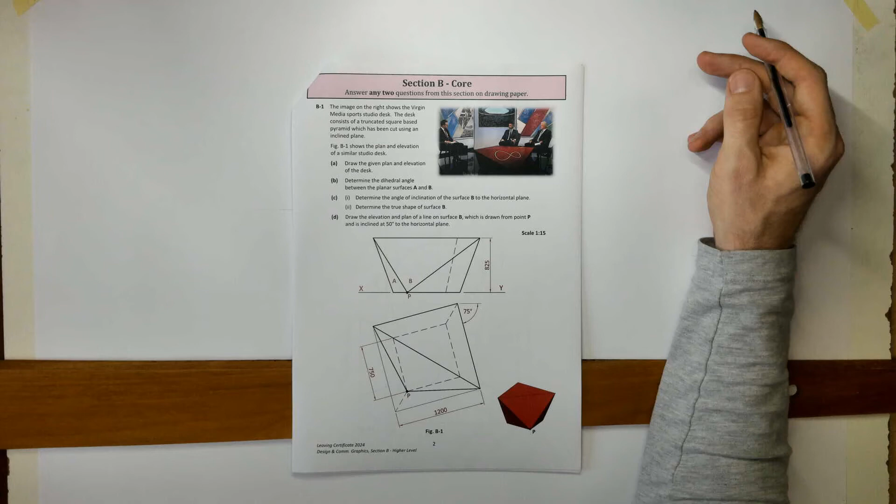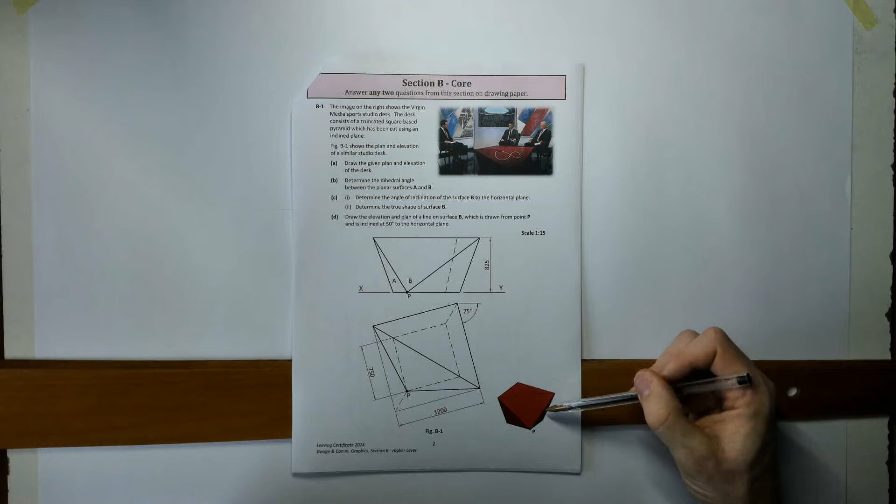This was an intersecting planes question. So the image on the right shows a Virgin Media Sports Studio desk there. The desk consists of a truncated square-based pyramid which has been cut using an inclined plane. Okay, so we've got a truncated pyramid, which is a pyramid that has been cut horizontally, and then we've got this inclined plane that's removed another piece of material down here, right?

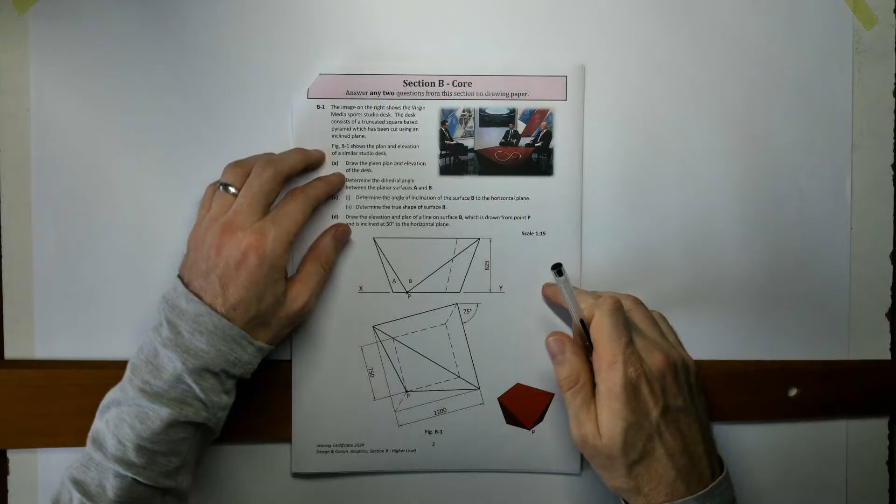So figure B1 shows the plan and elevation of a similar desk. So we've got our plan and elevation. We've got our 3D figure down here. So part A, draw the given plan and elevation of the desk. Okay, so plan coming first, so we'll start by drawing the plan. All right, if we look at our measurements here, we can see they're kind of large, right? And we've got this scale 1:15. So our measurements here, we're actually going to need to convert.

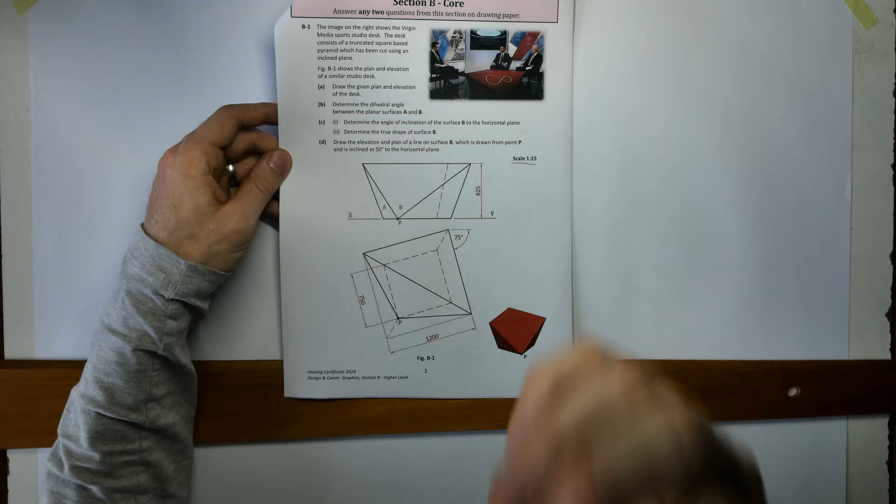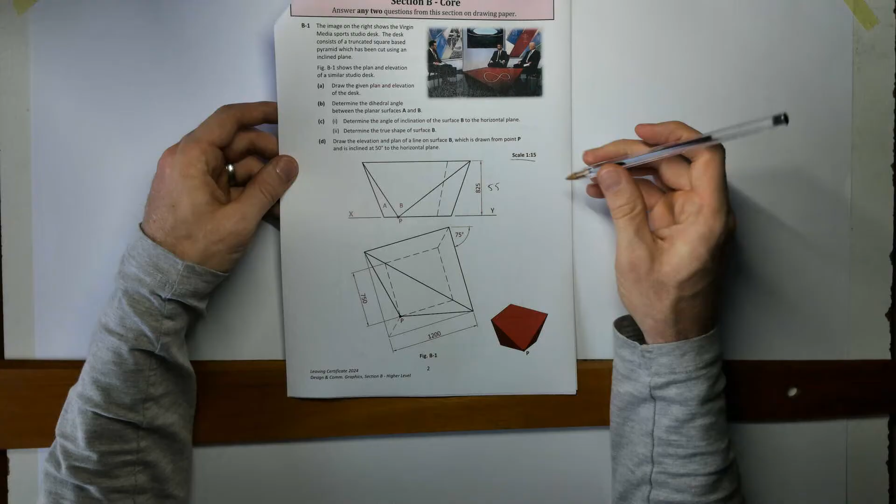So if I divide that by 15, okay, that is going to be 55. I'm pretty sure. 55. Yep, over here. And that's going to be 50. Yeah, it's 50. Okay, and 15 into that. That's 80. Okay, let me just double check that on the calculator. Yeah, so all of those are correct.

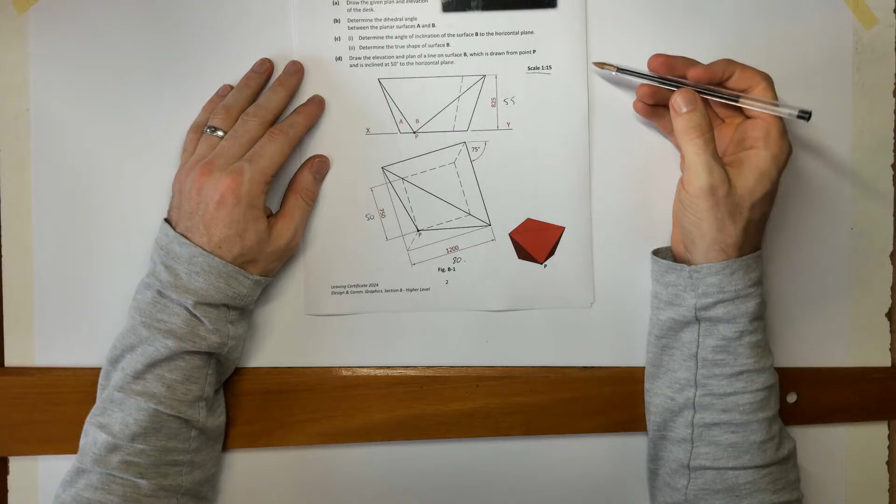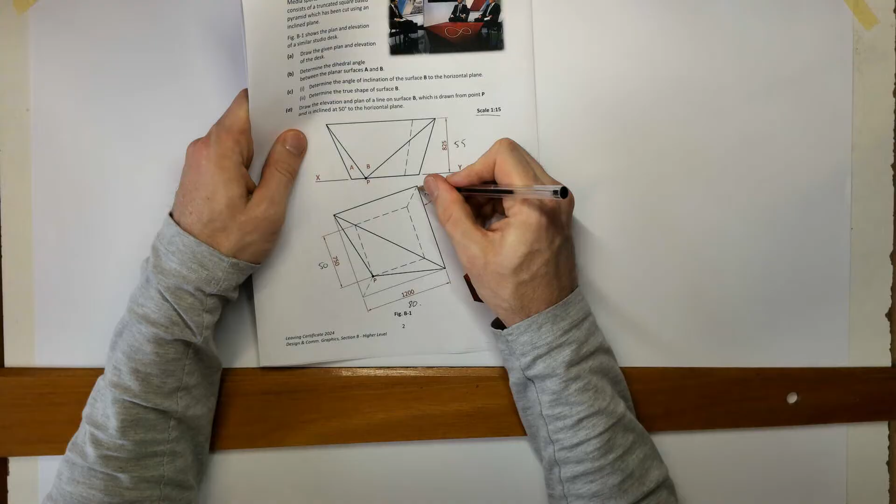All right, so I'm going to start with my outline of the truncated pyramid. So that top piece there, it's a square-based truncated pyramid, so it's a square here going around that. So a square side 80, and it's inclined at the 75-degree angle. Okay, so I'm going to pick a point here, maybe out there. That's going to be my starting point, right? And we've got that 75-degree angle. Now you could use your protractor to measure that, right?

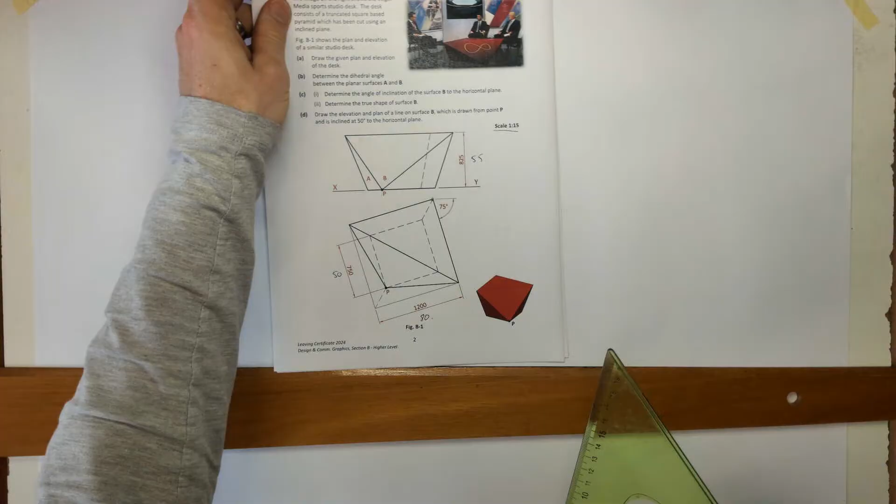But if I combine, just to show you here, if I combine my 45-degree angle and add on a 30-degree angle, 30 degrees plus 45, I get 75. Okay, so that will save me a little bit of hassle. So 45 and 30 combined. Let's just draw my light line, and I'll measure 80 on that.

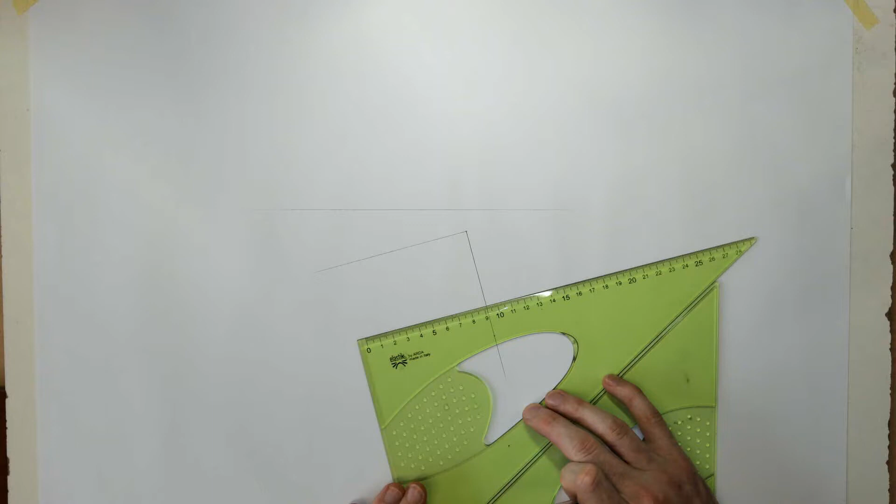Okay, and I can combine them here to get this line. The same, if I can get it to stay on the board. All right. So that's my 80 again marked off. And I'll combine them again for my final measurement, or my final edge. Okay, so that is the square that's on the top.

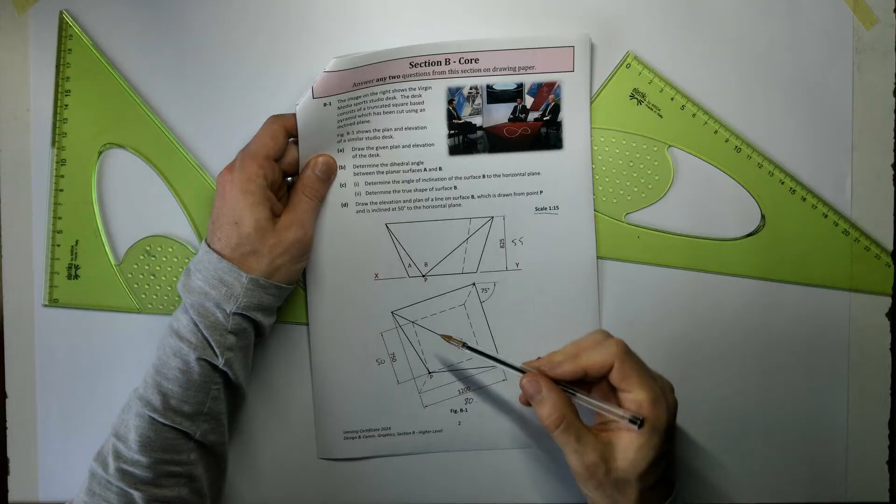We now want to mark off the internal part. So the hidden detail here of the base, which is 750, which is 50 there. So to find that, I'm going to actually draw a diagonal first of all. So draw the diagonal. Okay, and I'm actually going to draw a light diagonal from here to here as well. Right, now my 50 is the full width across there, so I'm going to measure 25 out either direction.

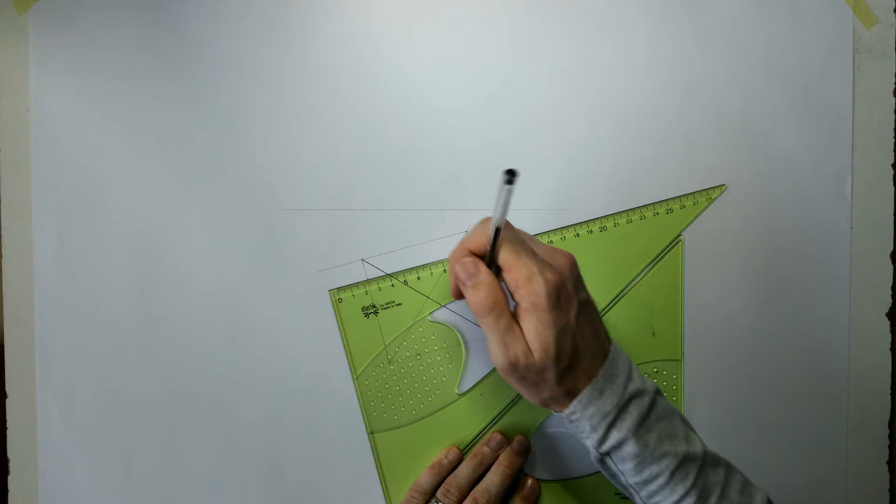Okay, so it's total 80, 30 is what I'm removing. So if I measure in 30, so 15 and 15, 15 and 15, that leaves me with my 50 there. Yeah. Okay. And I can use my combined set squares to start drawing those lines, finding those marks. Okay, so you can see here how having the two set squares together makes it all work a little bit quicker.

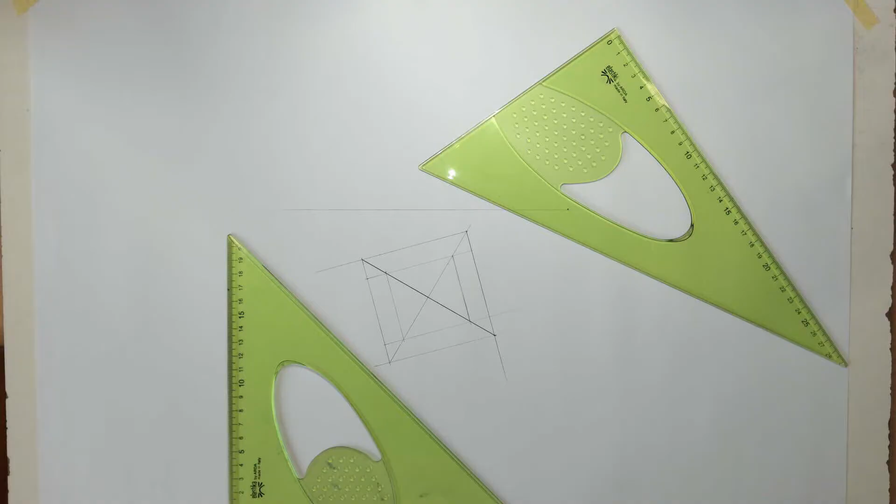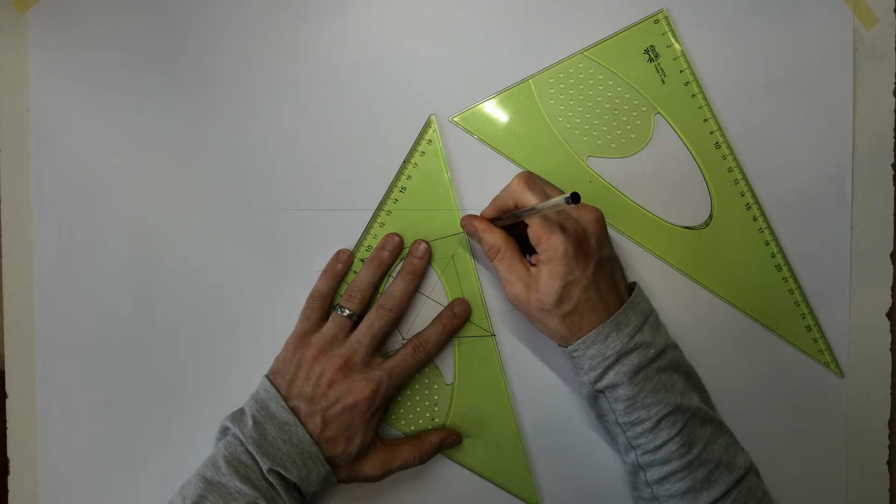Okay, and now we want to just finish off our outline. So we've got hidden detail in there, and we've got the join back to point P there. Okay, so that's the point P. Point P found. And we've got our other heavy edges for the top. Now we've got hidden detail. And the last piece of hidden detail.

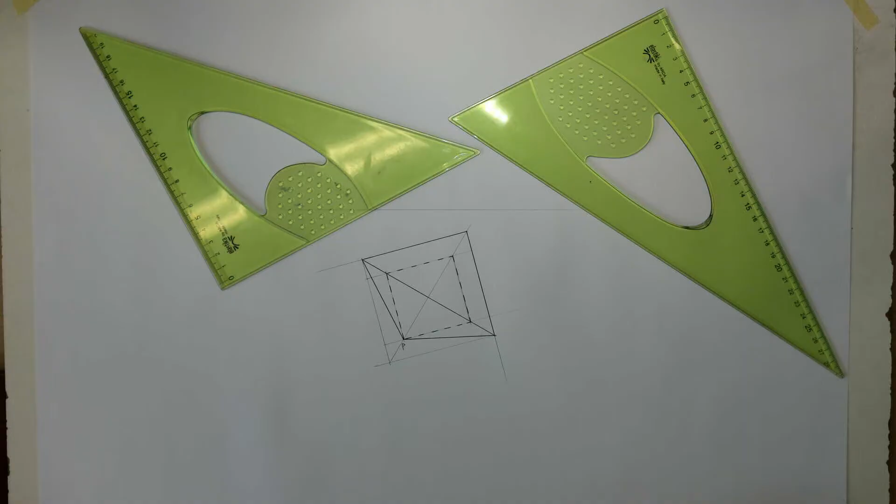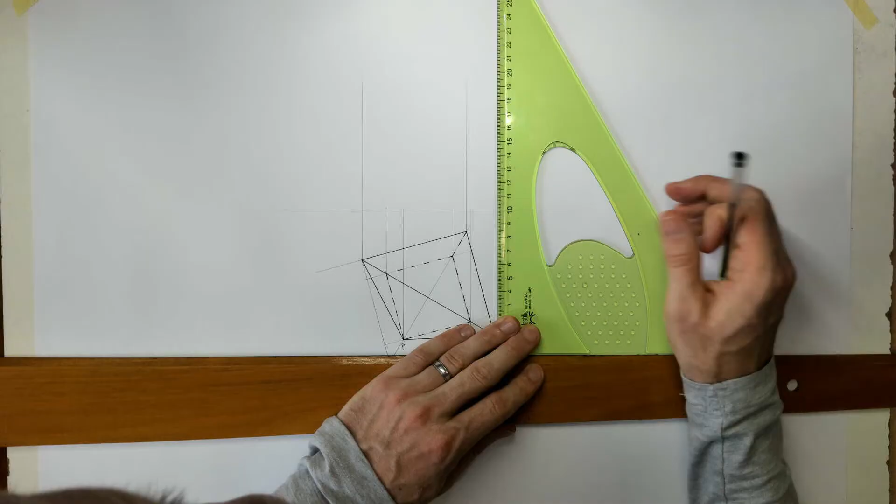All right, now onto my elevation. So the only height I have here for the elevation is that 55. So let's just project up each one of those. We're going to have our baselines as well. Yep, and 55 high. Right, so I've got the outline of all that. I just need to add in what's heavy and what's hidden detail. So we've got the outside edge, side edge to here.

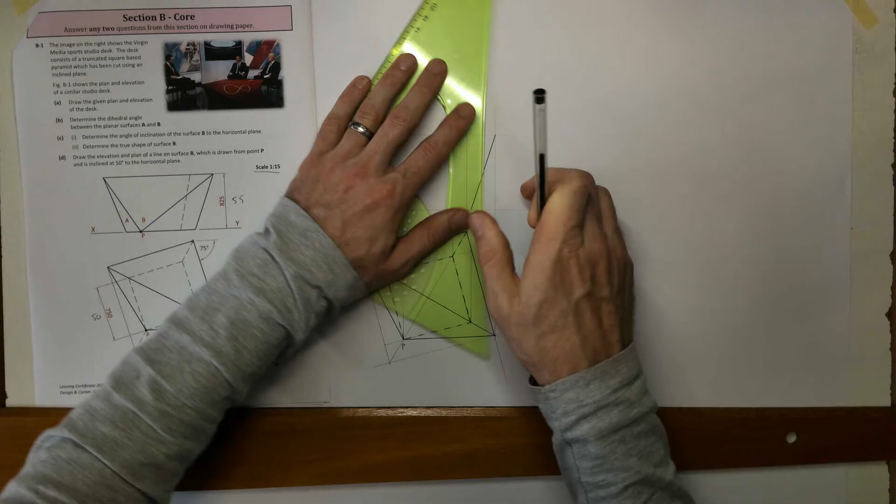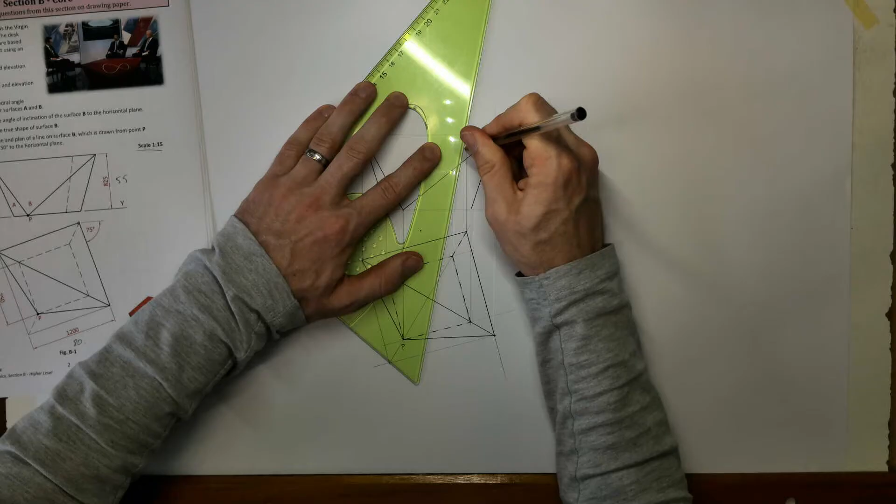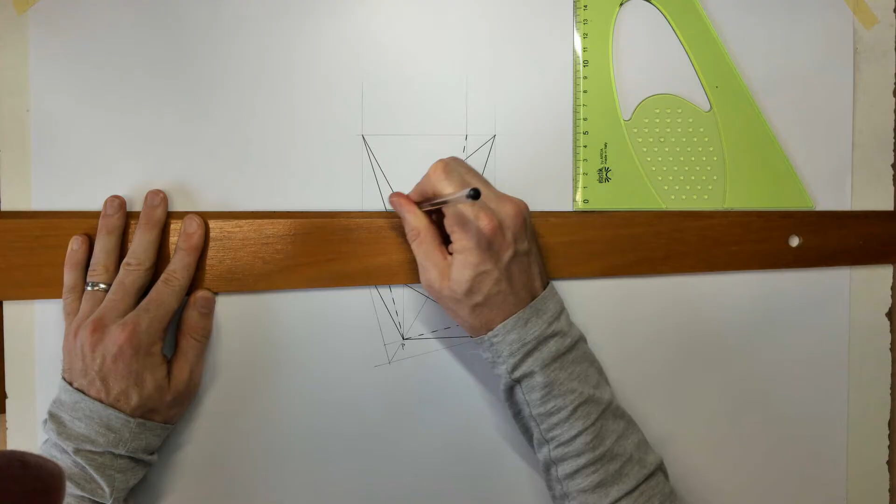That's my point P. And hidden detail line. And let's not forget the top. All right, and point P. Right, and we got surface A and surface B. So that is my plan and elevation. Just want to check everything.

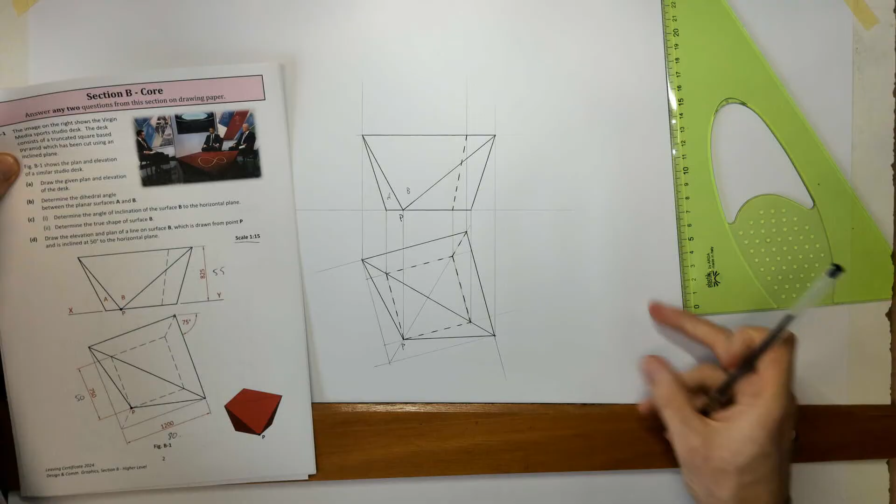Yeah, completed there. Now, part B, determine the dihedral angle between the planar surface A and B. So here's surface A. There's A in there. And here's surface B, and that's surface B. Okay, so first of all, we need that line of intersection. So my line of intersection between those two planes will be this one here. So that's my line of intersection. And here it is here also, line of intersection.

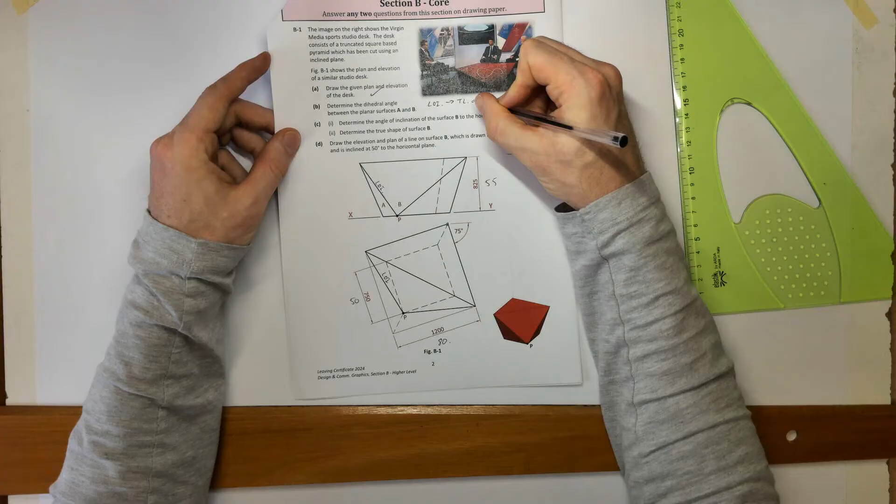What we want to find then is the true length of the line of intersection. Okay, through an auxiliary view. So we're going to look at perpendicular to it, our x1, y1 out here, and draw our auxiliary view. And then we're going to find our point view.

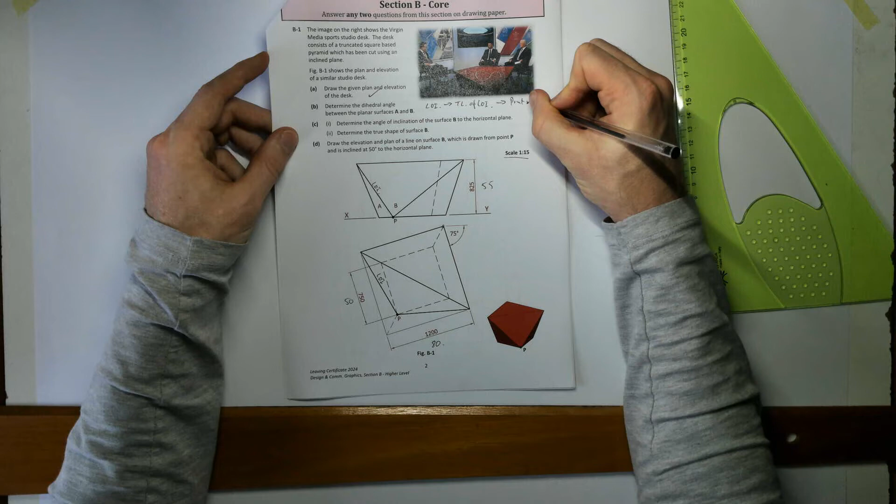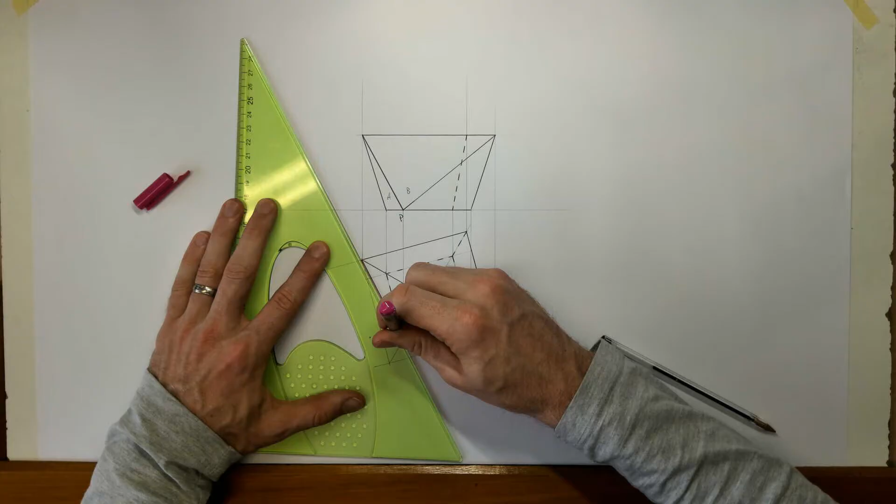Point view of LOI, and that should find us our dihedral angle then. All right, so let me just highlight the line of intersection first there. So here's our line of intersection, and here it is. Okay, so LOI. All right, so we want to look at perpendicular to that.

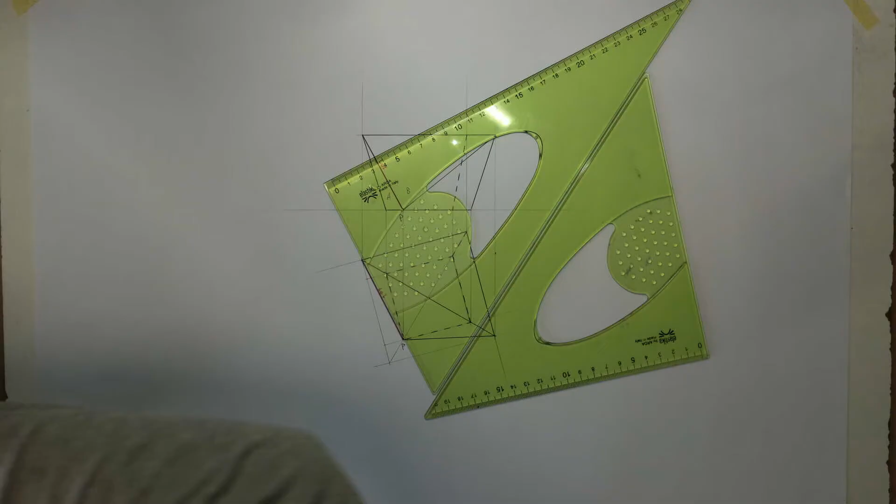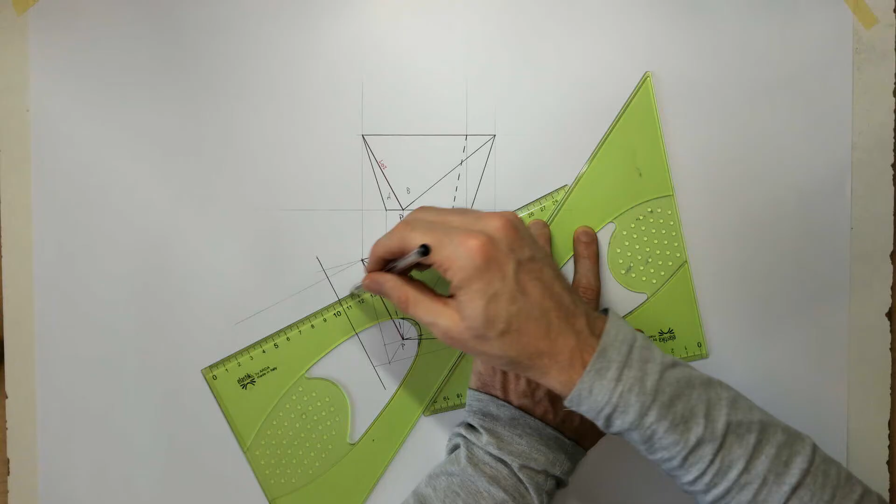So here's my sliding set squares. Let's set up my x1, y1 parallel to the line of intersection. And we're going to project out all the points of surface A. And I need to slide this again. I need to find surface B also.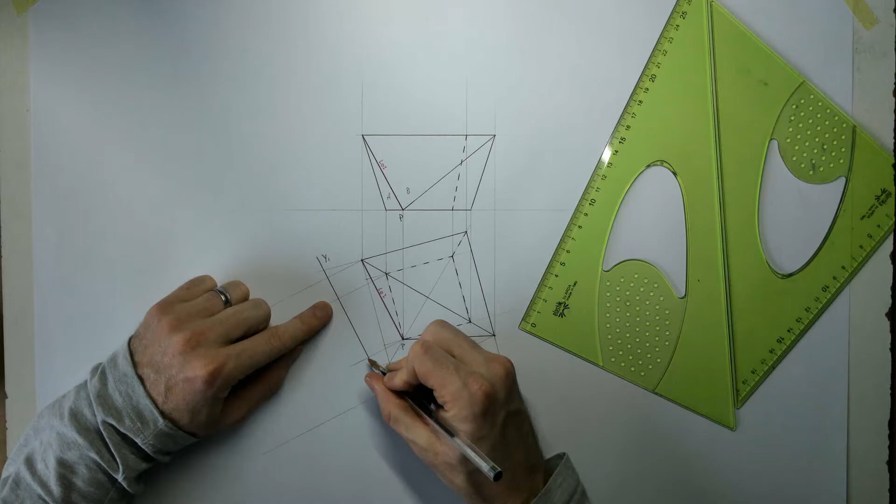Okay, so that's my x1, y1. Right, so I'm creating an auxiliary plan. Sorry, auxiliary elevation. So I take my heights from the elevation. So we've got various points. So P, this is point P on the ground. This point is also on the ground. We follow it up, right?

We've this point here, which is on the line of intersection. We follow it down, so I need to step off that height, which we know is actually 55, but it's good to have the habits of showing that with an arc. And we've also got this point, which is also a height of 55.

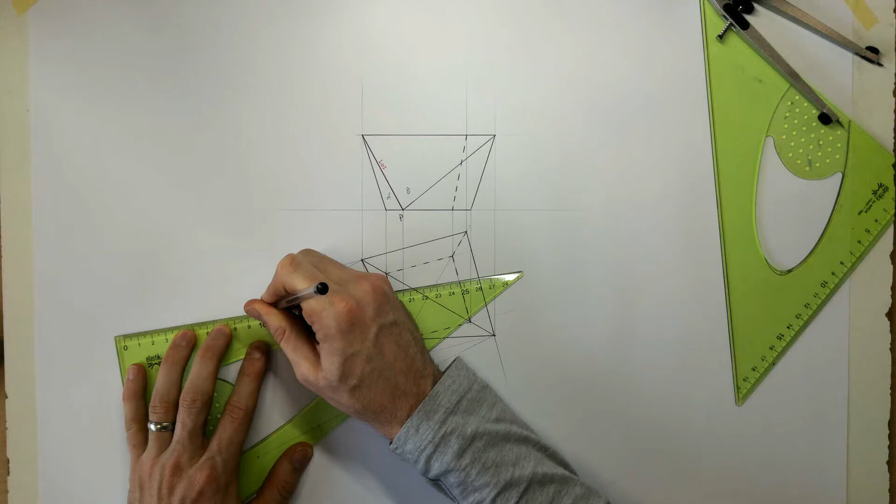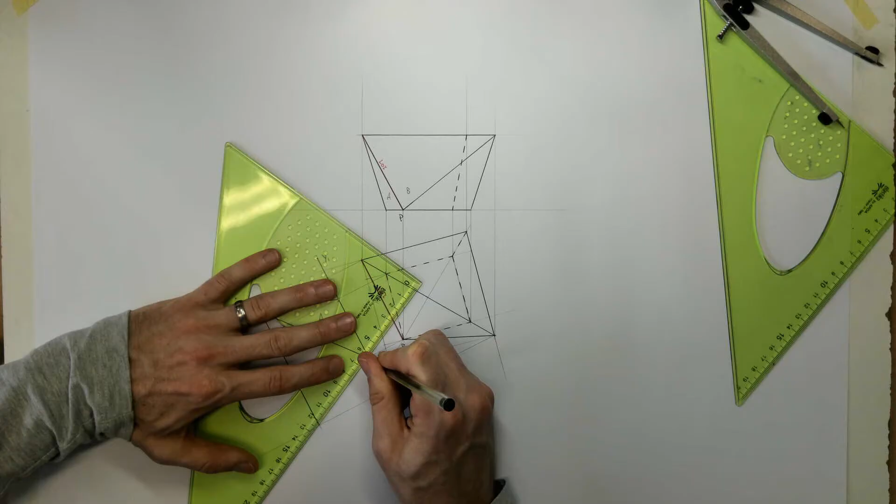All right, so let's draw up that surface A to begin with. And here's surface A as well. So that's surface A. Here's surface B then, and that's my line of intersection. Surface B. And let's just highlight the line of intersection here for you again. That's the true length of LOI.

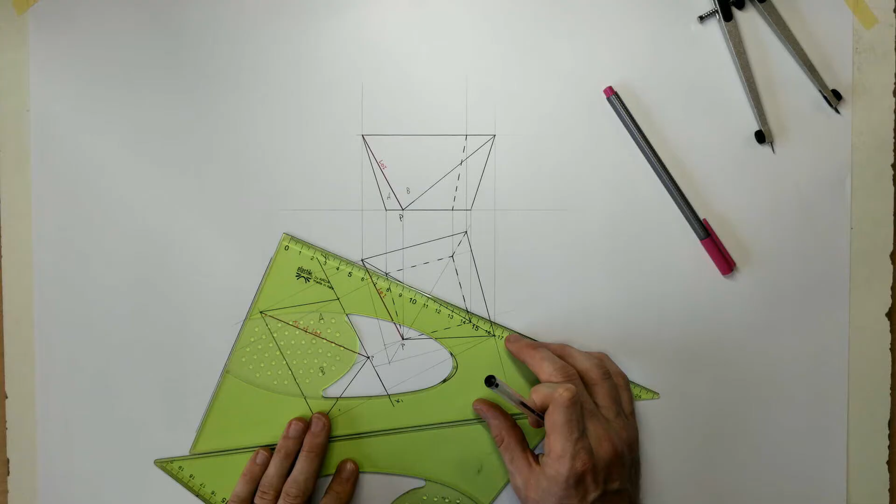All right. So now I want to look along. So I've line of intersection, true length of line of intersection. Now I want to see it as a point view. So I'm going to look out along the line of intersection. So my x1, y1, or sorry, x2, y2, and I'm going to project out our distances, so our lengths, our points.

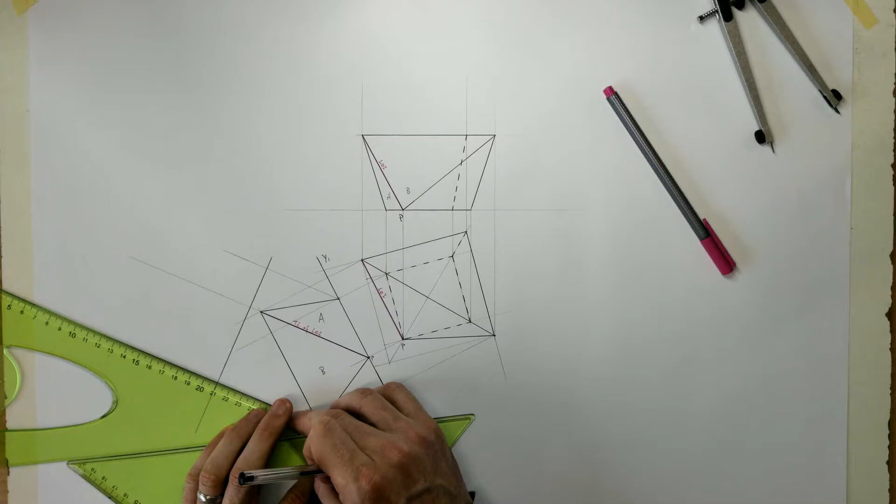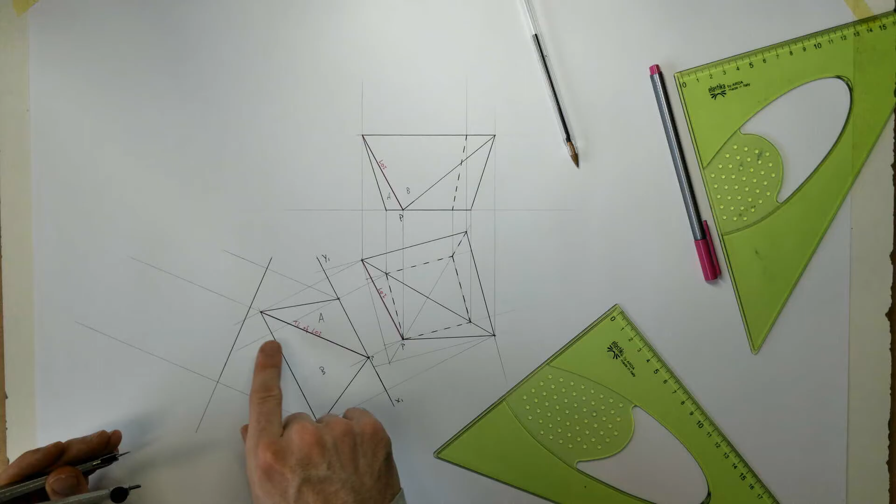All right, and projected them all out. Okay, so now we need to go back two views to get my heights. Okay, remember, if you ever forget this, right, we're looking to find a point view of the line of intersection. So whatever the distance is that I step out for this point, it'll be the same for this point.

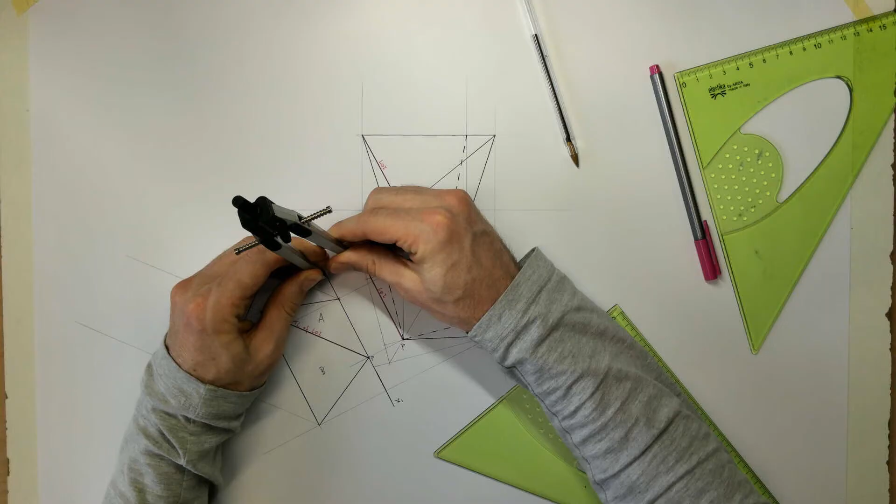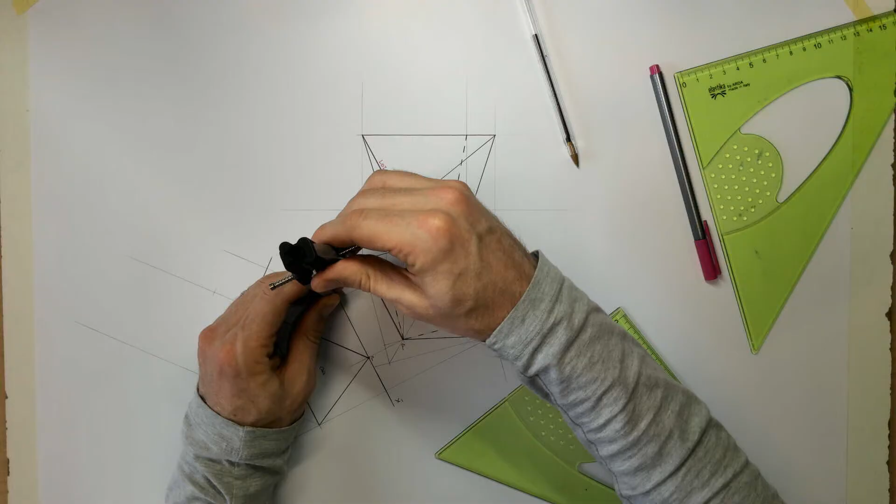If we go back here, we can see the distance for there is the distance for there. So I know that's where I'm going to take my heights from. X1, Y1, back. So those are the same distance. That's going to find me my point view. And then this point, step that off also. So I have to extend that line a little bit further. And finally, this point here. Okay, so extend that a little bit further.

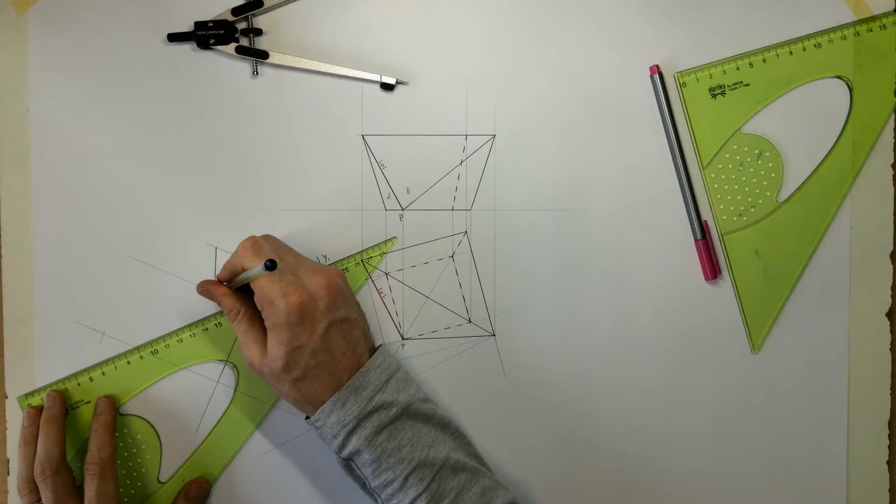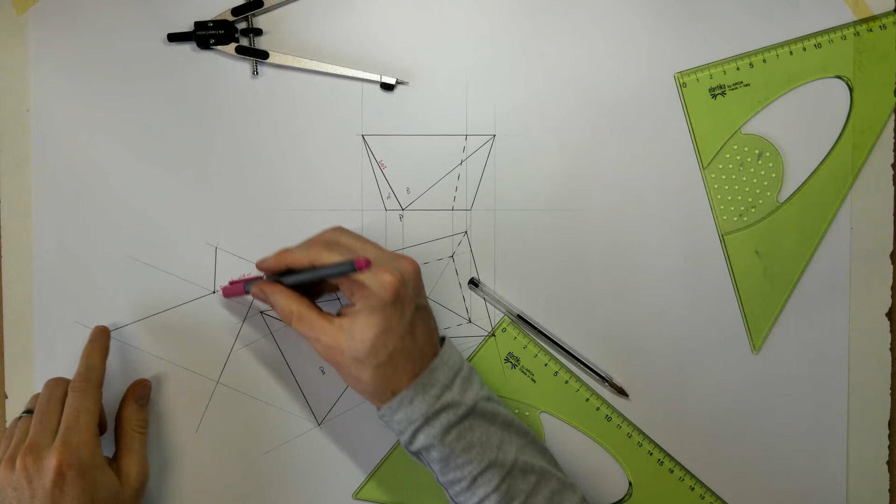Okay, so here we have our point view of the line of intersection. So point view of LOI. All right, and we've got our two surfaces there. And did they say to indicate, determine the dihedral angle? Okay, they don't say to indicate it, but I'm going to measure it because it's a good habit to have.

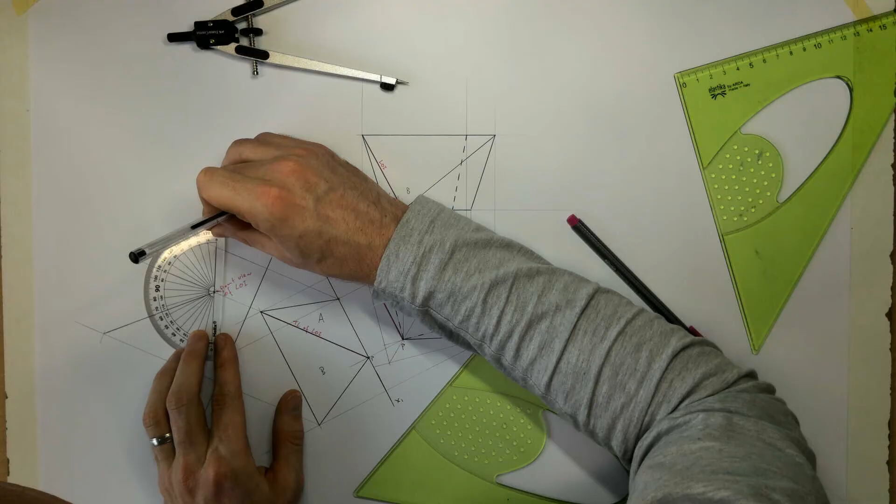So, measure there. Got that at 116. Okay, so 116 degrees is my dihedral angle. Okay, so that's part B completed. All right, my point view also completed.

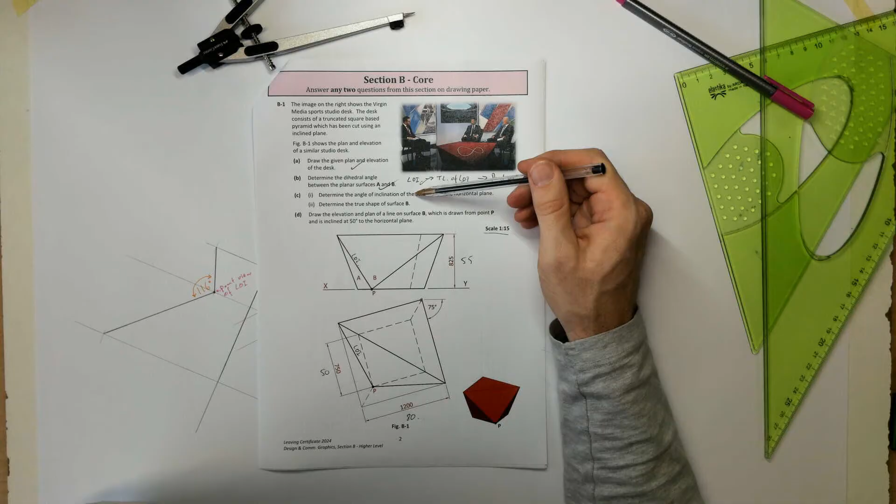Okay, part C1, determine the angle of inclination of the surface B to the horizontal plane. All right, surface B, we're going to find its inclination to the horizontal plane. Okay, so we want to see surface B as an edge view and the horizontal plane as an edge view also. Right, so I'm just going to pause the video and highlight surface B for you. Okay, so here we have surface B highlighted for you.

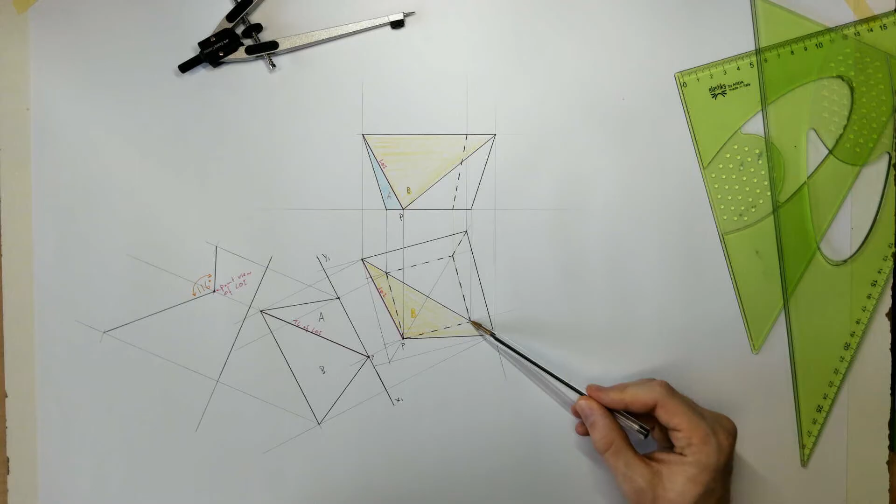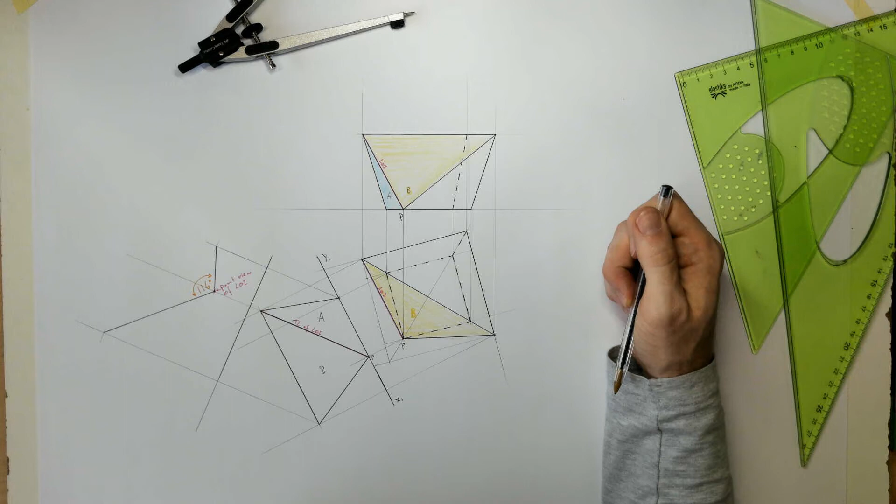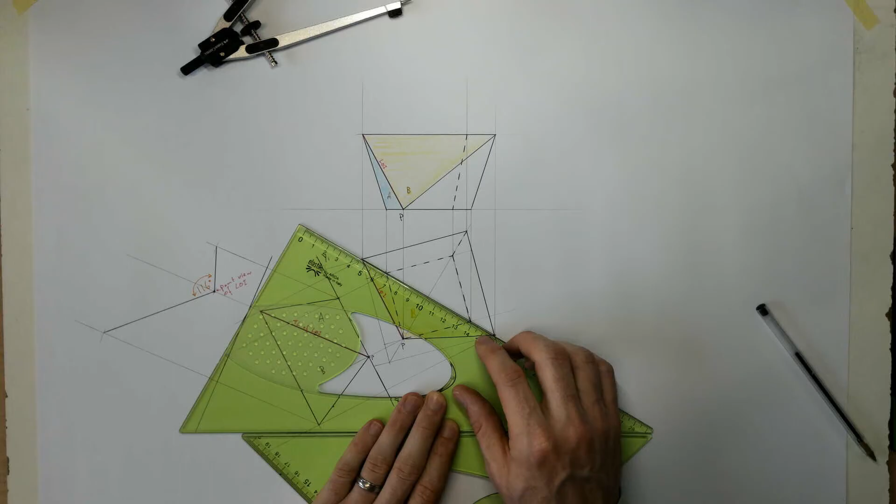All right, if we look at surface B and what's the makeup of surface B, we have our line of intersection, we have this sloping line also, and then we have this line here. If we look at that line in elevation, that's a horizontal line. So I know a horizontal line, if I look down on top of it in plan, is a true length line in plan. Okay, so this line is a true length. If I look out along that true length line, I'll get an edge view of that plane. All right, so we are going to do an XY line perpendicular to the true length line. Okay, and this.

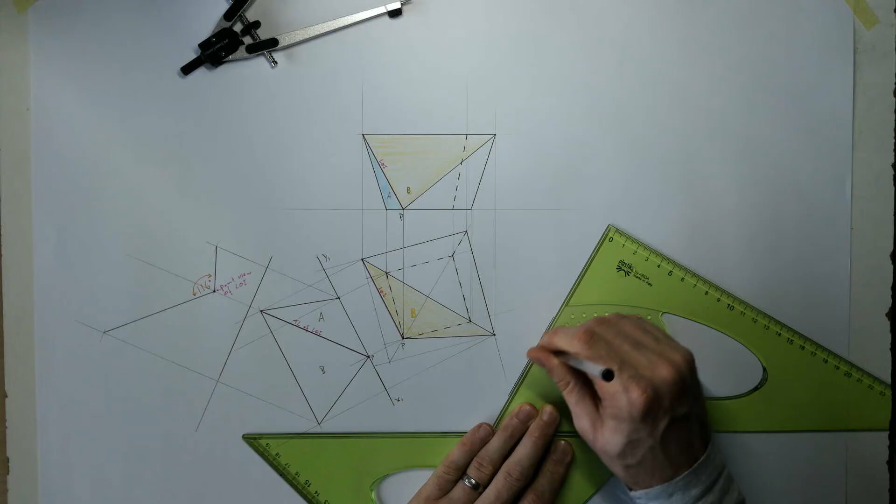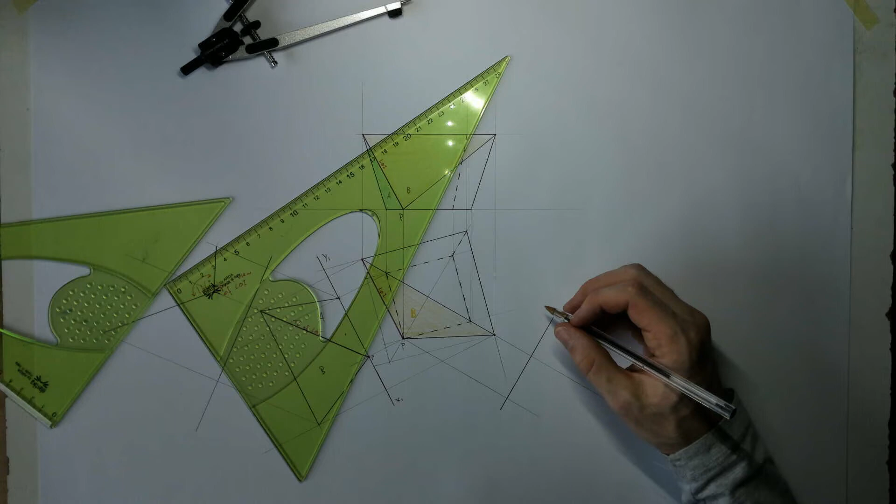All right, and we'll project out B. Just extend that a bit. So I've got an X1, Y1 here. X1, Y1. So we're projecting an auxiliary elevation, so my heights I need to take from the elevation.

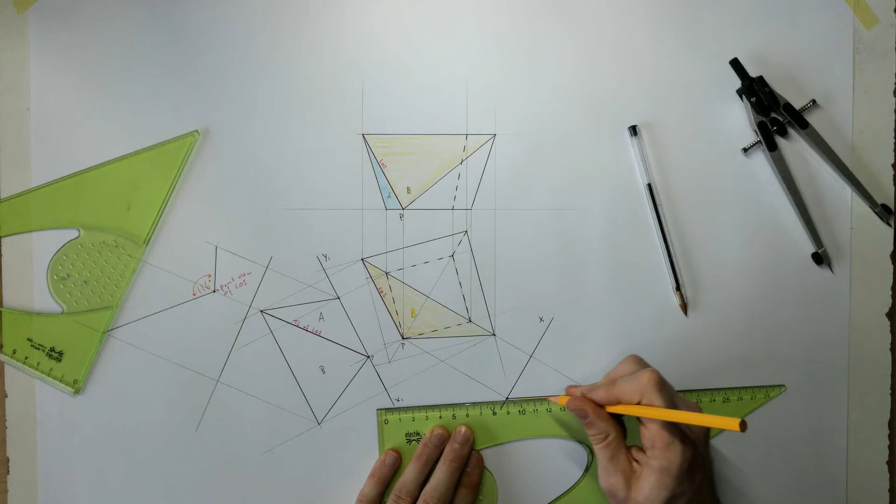Compass. So P, here's P, so that's a point. This and this, if we follow them up, have the same height. So let's get that height, step it off. And now I've got an edge view of surface B. So here's my yellow guy. So that is an edge view of surface B, and we have an edge view of the horizontal plane.

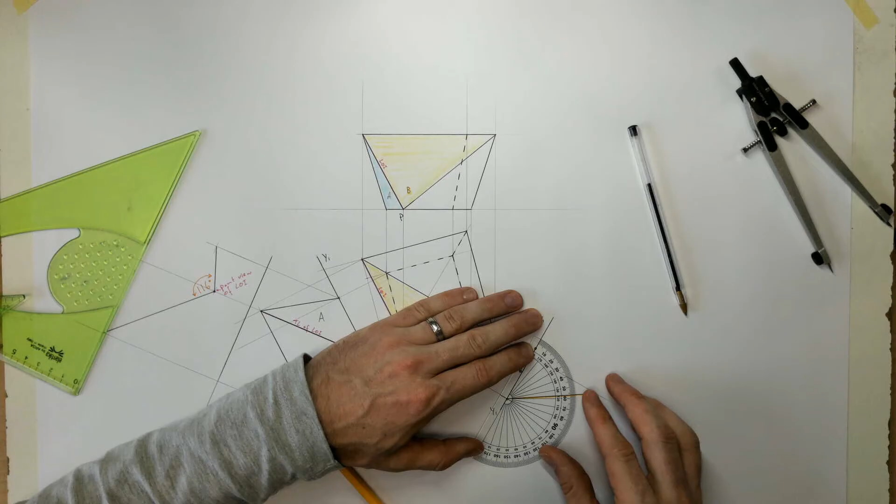So they've asked us to determine the angle of inclination. So what I can do now is measure that angle between the two. So let's come along and measure that angle. I've got that at 57 degrees. So let's go with 57 degrees.

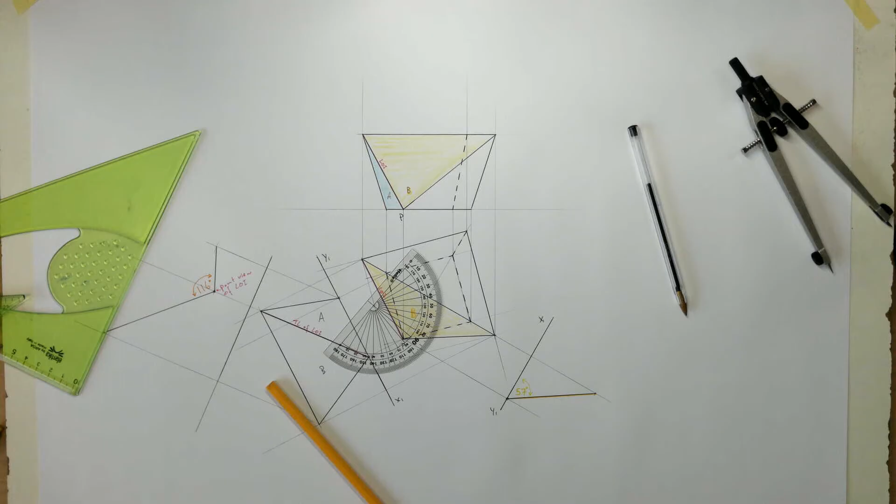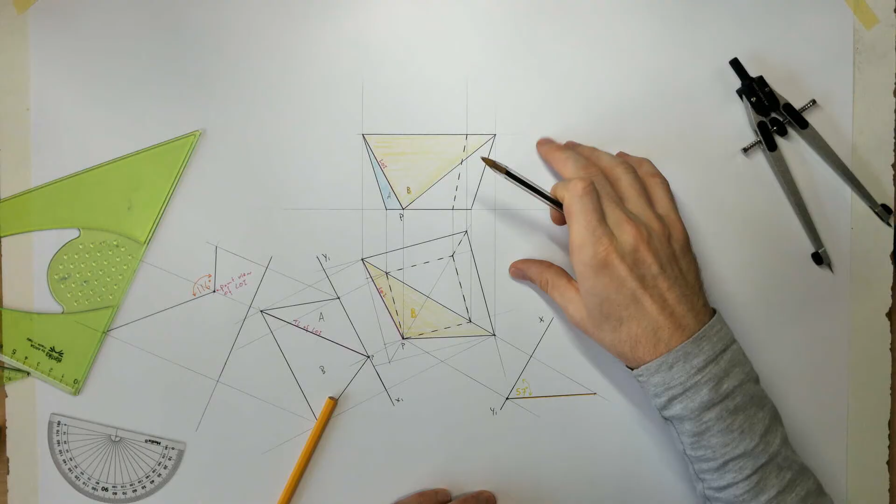That's part one. Part two then, determine the true shape of the surface. So if I have an edge view of a surface, if I look perpendicular to it, so if I look this direction, or this direction, perpendicular to it, and draw an auxiliary there, I'll get the true shape of that surface. So to put that on the page, I'm just going to go up this direction. So we want to project up.

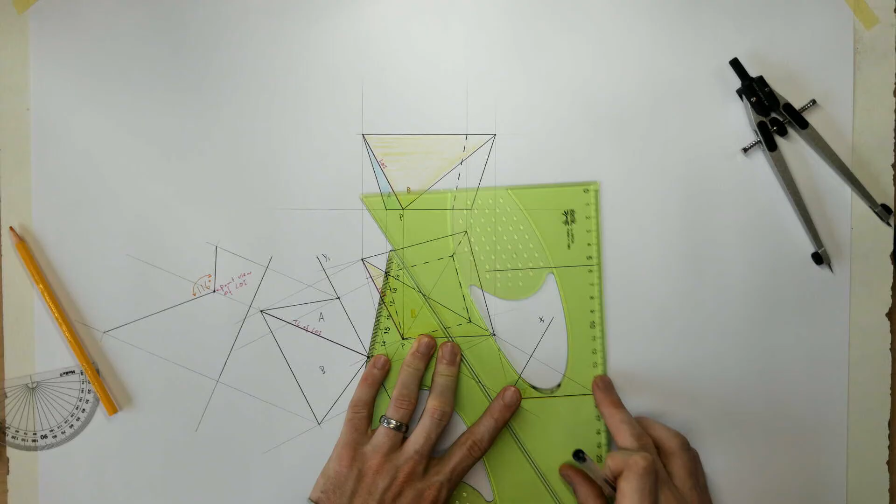So my x2, y2 is up here. I'm going to project up that edge, that edge. I probably need to project this one a little bit further. So once again, we're going to go back two views. So here are my distances back from x1 y1 back to plan. So my first one is that distance. Follow it up to there.

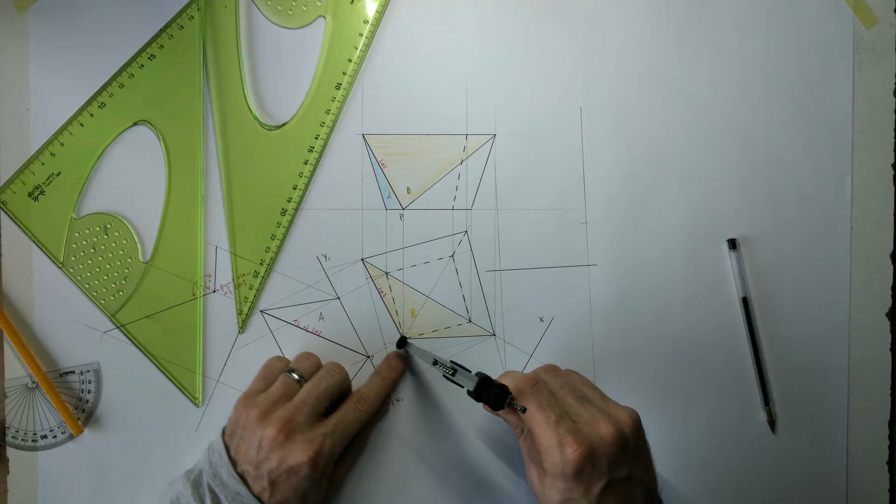My next distance will be from here to point P. Follow that up. I'll have to extend that line a little bit further, and finally my distance to the other side of that plane. Follow it up, I'll have to extend that as well.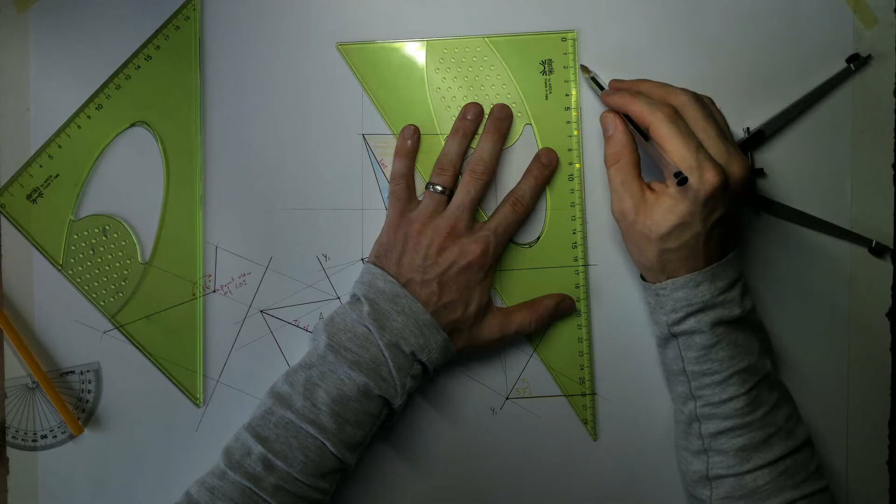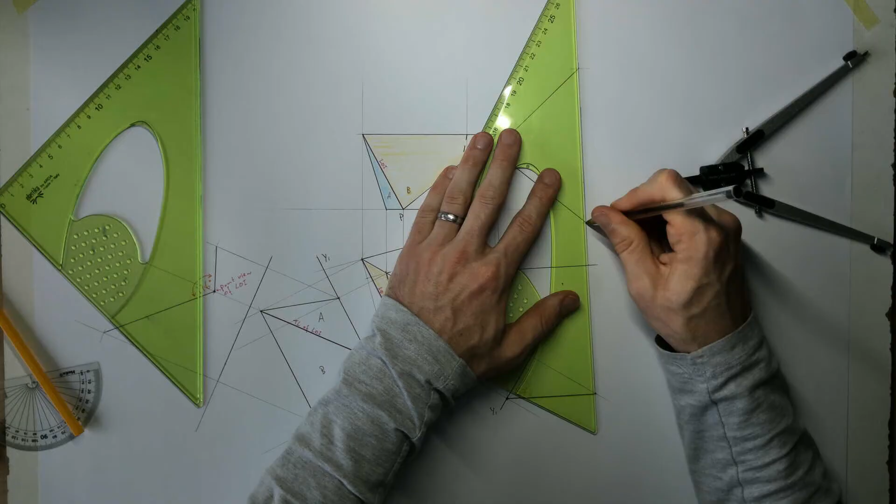All right, so there's my plane B, the true shape of it. So that's a true shape of surface B. So I can shade that in as well.

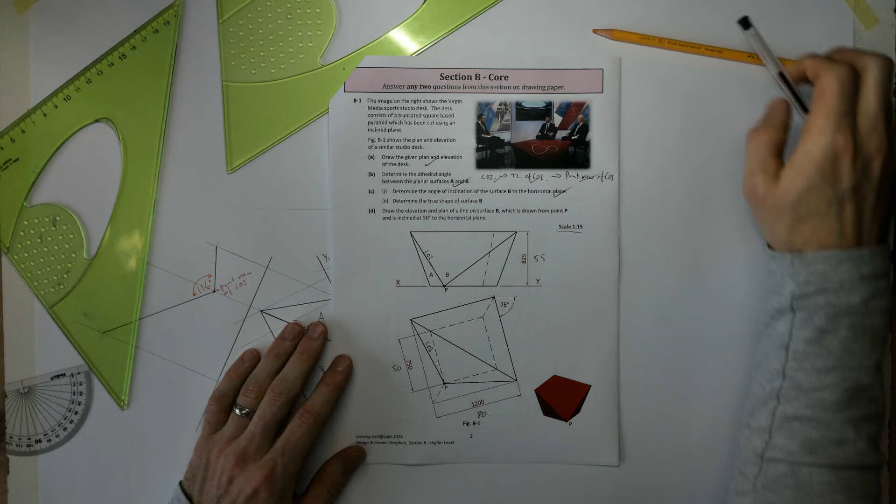Finally then, we're on to the last part of that question. So tick that off. Draw the elevation and plan of a line on surface B, which is drawn from point P, and it is inclined at 50 degrees to the horizontal plane. So this is a tricky bit in this question. We haven't seen something like this in a couple of years.

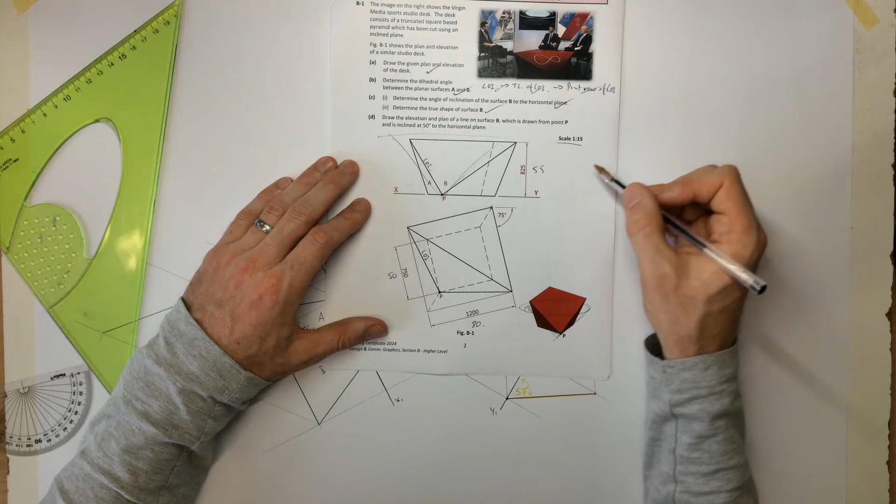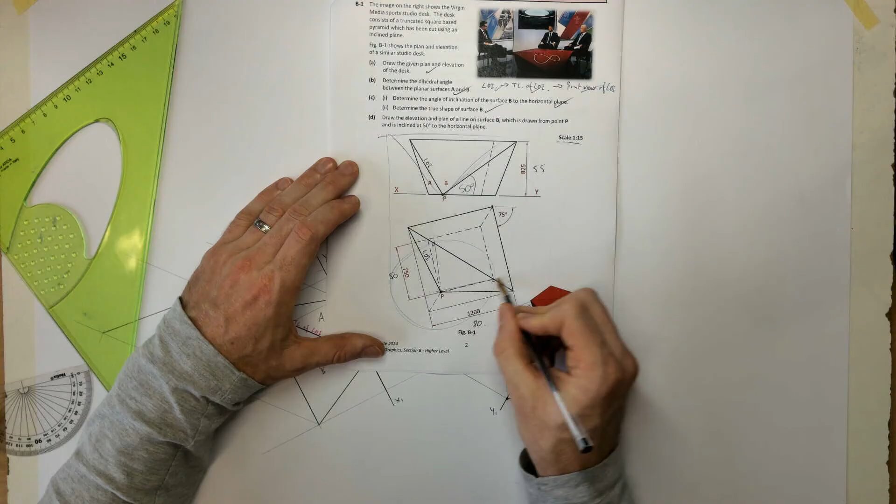So what we want to do is draw a cone, an inverted cone, so an upside down cone. Imagine it's there like that, and that cone has a 50-degree angle on its generators. So if I draw that here, my 50-degree cone, one of those generators will intersect this plane. Imagine if I drew that cone down here, I'd see it intersect at 2 points. I get two generators that intersect on that surface at 50 degrees. So that's what we're going to do.

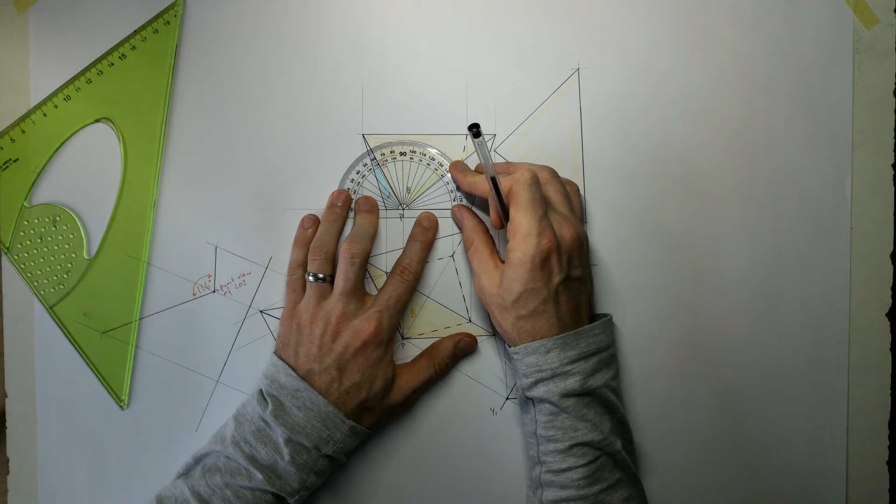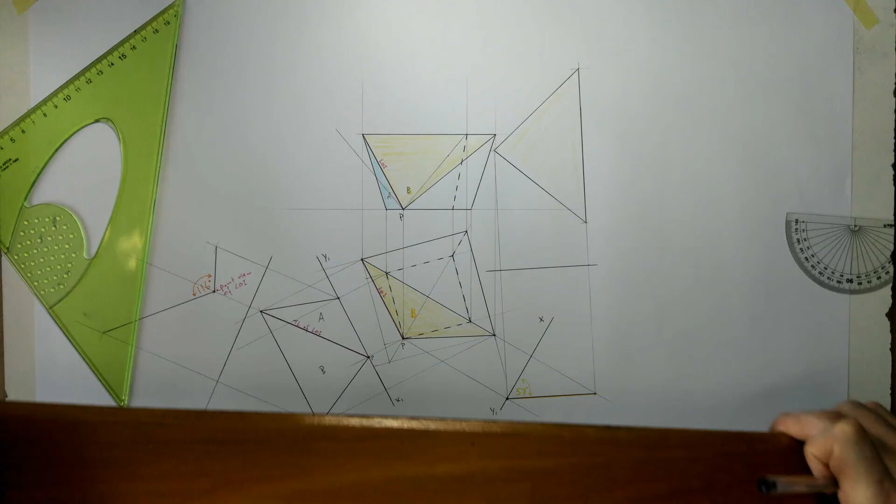We need to measure an angle of 50 degrees first of all, so 50 degrees from P. And I'm actually going to measure it in both directions, 50 degrees. So that's the elevation of that cone.

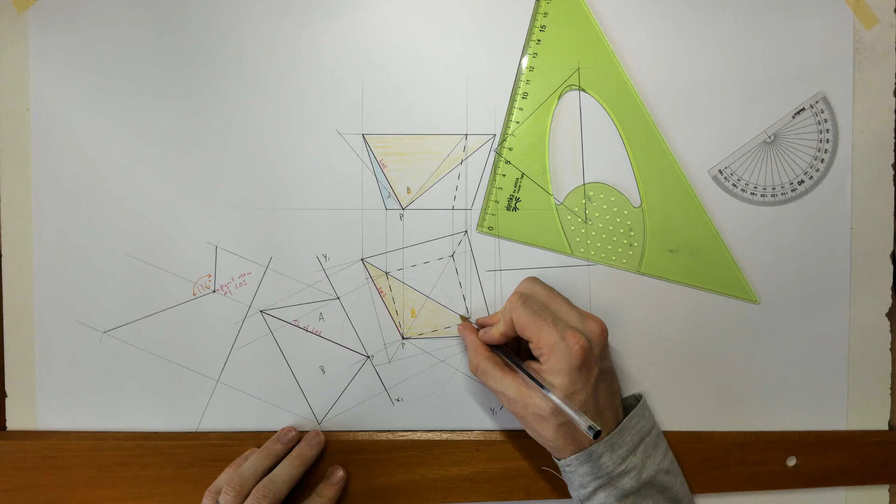And I want to draw it in plan, so I need the radius of it. So let's drop down here. Actually, maybe draw it down here. And there's the radius. Let's get our compass, set it to that radius. That's the plan view of that. So now I have a point and a point, and I'm going to join that back to point P.

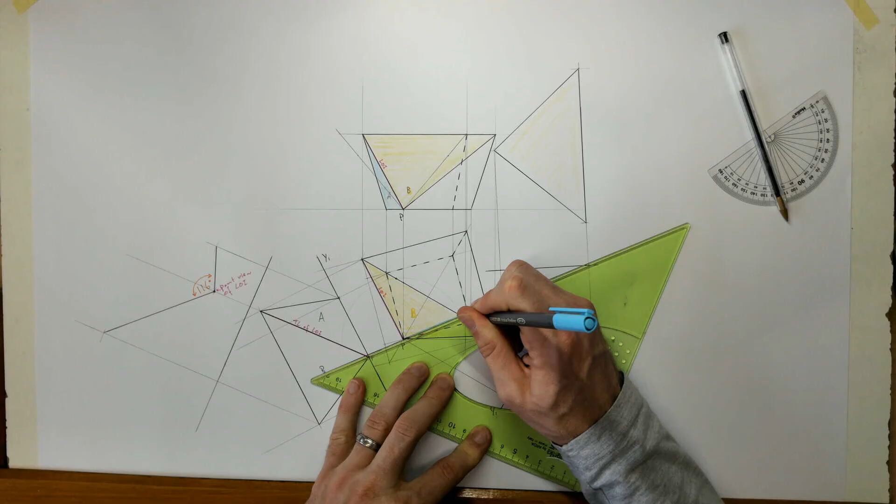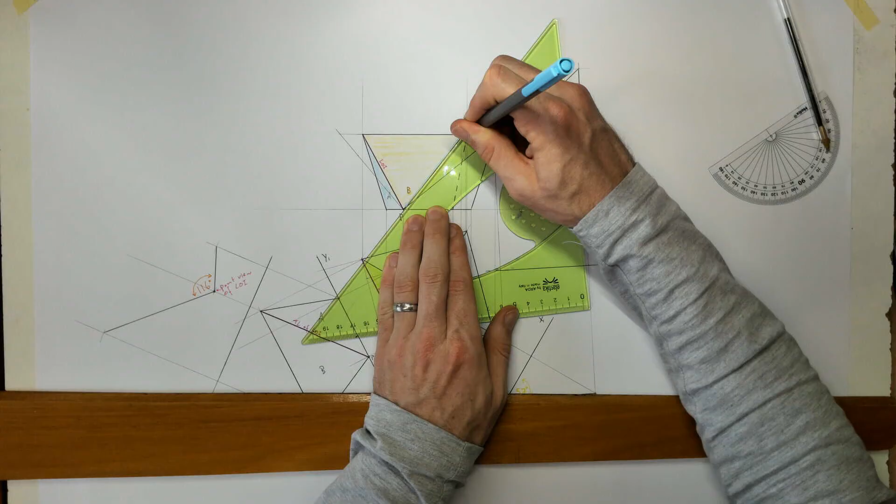So they're only asking us to draw the elevation and plan of a line, so I only need one of them. I'm going to draw that one there. And I'll show that in my elevation as well. They're looking for plan and elevation. Like I said, you could have another one here and project it up and draw it, but one is fine. If you want to show two, by all means do.

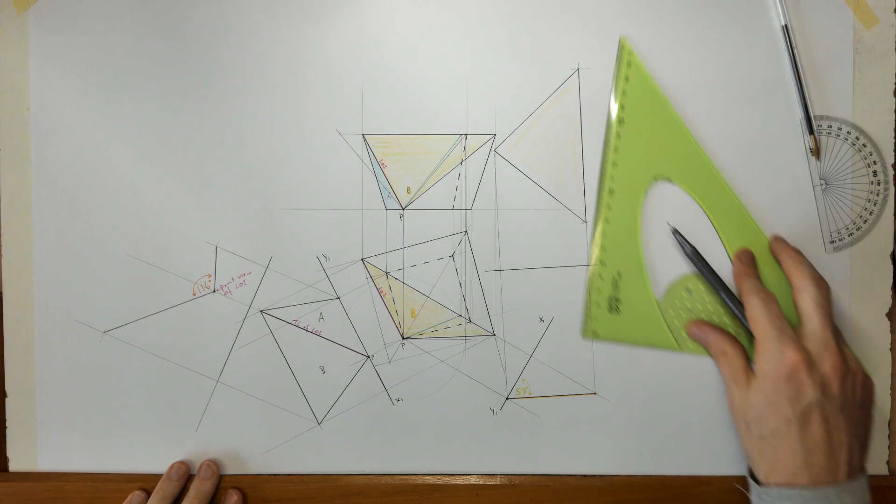So that finishes that one off, part D. So that was an intersecting planes question. Pretty straightforward, a lot of it. It's the last part D there we haven't seen in a bit, so that would have thrown some guys off.